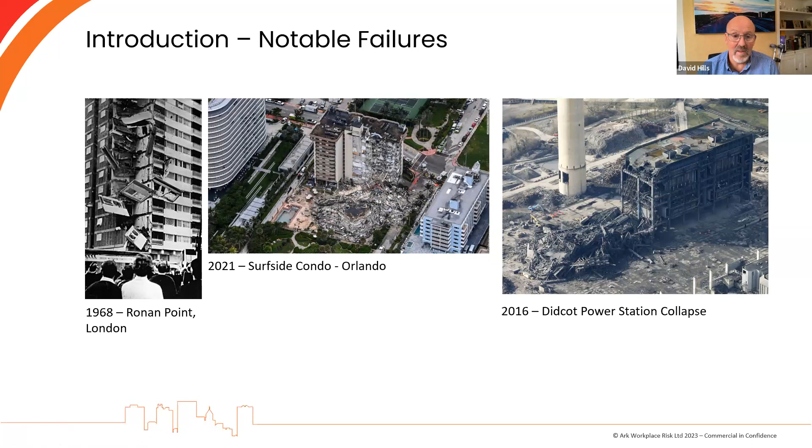So what is structural risk management? Structural risk management does depend upon where you are in that building's life cycle. For example, structural risk management in the design process is completely different to during the service life of that building, the in-use area. During the design process, you will have structural engineers undertake a technical design and development for that particular building. During the construction process, structural engineers will continue to be involved and deal with change management.

Now, obviously, during the in-use phase of that building, you're going to need to undertake ongoing assessment and inspection of that building, depending upon the design and the arrangements. And then during any refurbishment, you would normally have a structural engineering technical design again with ongoing management, and then again through development and into demolition, you'll need further technical support and ongoing management.

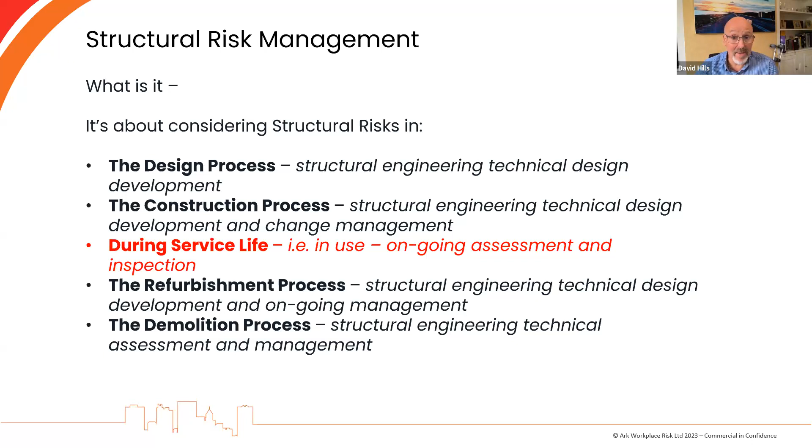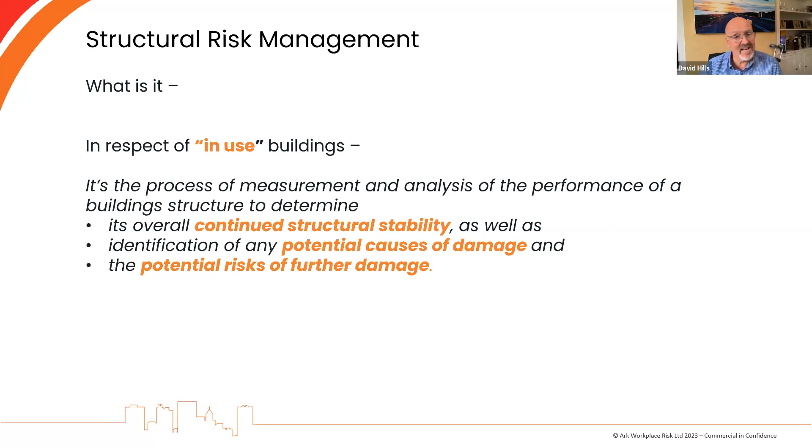So I'm going to focus, as I said, on the in-use buildings area. For in-use buildings, structural risk management is actually a very simple process. It's a process of measurement and analysis of the performance of that building's structure. And what we're looking to achieve through that process is 3 things. We want to determine the overall continued structural stability of that building, making sure that it's going to stay there and continue to perform as designed. We also want to identify any potential causes of any damage and understand any potential risks for further damage. So structural risk management is about measurement and analysis of the performance of that building.

Next slide, please. Now, the benefits of structural risk management are relatively simple and pretty easy to understand. It's going to provide you with very good early warning of any structural weakness within your particular building, be it residential, commercial, or retail, it doesn't really matter. We need to understand what those potential structural weaknesses are and determine if we have any damage within that building. Now, this is going to be crucial for different reasons.

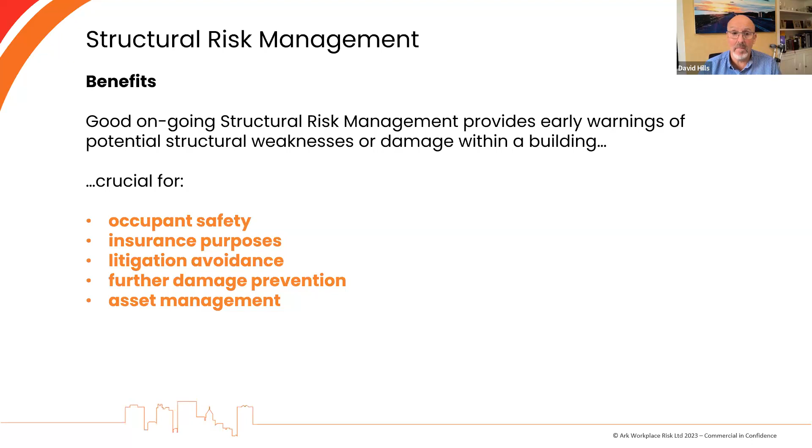Clearly, under the Building Safety Act, which focuses very much on residential blocks, it's going to be crucial to ensure the occupants' safety, the safety of the residents within that building. But it's also going to be crucial for insurance purposes, ensuring that you're getting the best out of your insurance premiums and the most favorable rates. For avoiding litigation, you certainly don't want to get involved with litigation, and understanding how that building is operated, designed, and how that structure is working is important, and also to further prevent damage to that building, and of course day-to-day asset management.

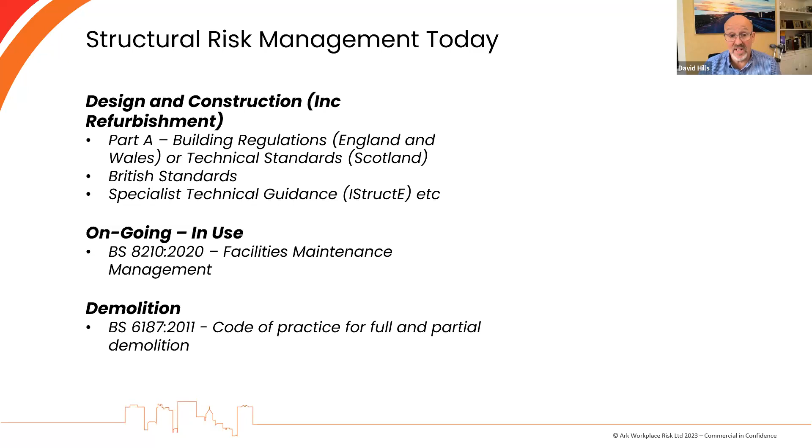And then going on from that, just focusing on one British standard, but there is plenty of other guidance out there in respect of demolition, we've got BS 6187, the Code of Practice for Full and Partial Demolition, which will support risk management processes through the demolition process. Next slide, please.

Okay, so I'm going to focus for the next couple of minutes on BS 8210, because structural risk management is fully enshrined within that Code of Practice, and it's a really good Code of Practice that supports the whole process. It makes a very clear statement early on which suggests that failure to maintain the structure and fabric can affect its function and presents safety risks, in addition to reducing the value of the facility as an asset.

So clearly, structural risk management is a key element here in order to maintain the building, and as part of a facilities management team's processes as well. Next slide, please.

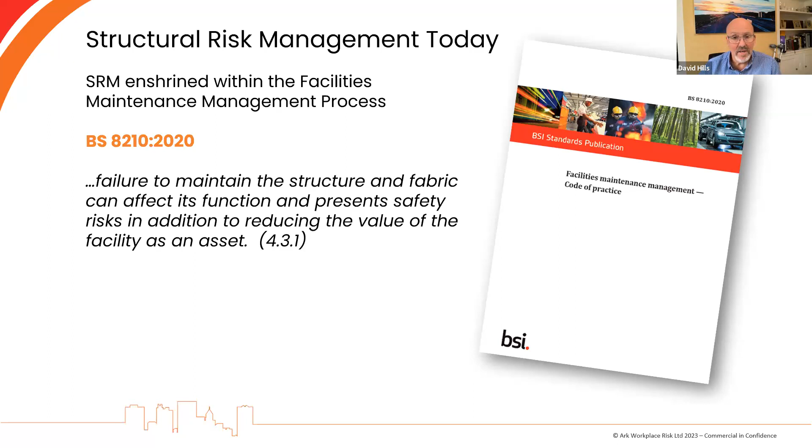So what does the standard suggest that you should be doing? First things first, you need to understand the building. So you need to maintain records relating to the structure of that building. The first thing we ought to try and get hold of, and I understand that getting hold of some of this information is incredibly difficult, is plans and design arrangements. Understanding the design parameters of a building is vital.

It used to be that many buildings, especially in London, had signs within them to indicate the design loadings. That requirement has gone, but understanding those design loadings is a really important element, especially if you're going through refurbishment or change of use, say a commercial office block that's being converted to a residential block. There will be differences in respect of the loadings, and they need to be fully understood.

In addition to that, you need to really understand the structural detailing. Now, I'm not suggesting that you need to understand the full structure of the building and how it operates. You need, though, to understand the key connections, where those connections between, say, columns and beams are, and how they need to be treated, how reinforcement needs to be protected.

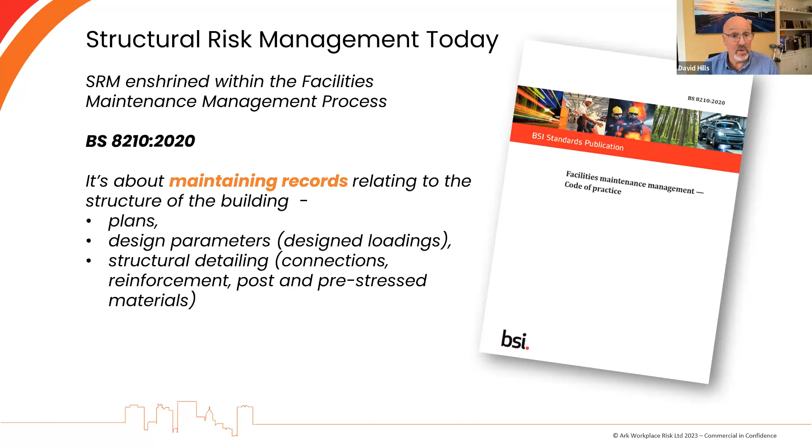And of course, if you've got post or pre-stressed materials within that structural frame, then you need to know exactly where they are so you know how to treat them during the maintenance processes. Next slide, please.

One of the things that is very interesting within the standard is that they make it very clear that you need to be assessing and inspecting the structure of the building on a regular basis. In fact, it states that a full assessment and inspection at intervals of not more than 3 years for the structure and fabric, etc., should be undertaken by competent persons.

I have to say, in my experience, we often suggest this to clients, but we're just not seeing organizations undertaking this type of really important inspection and assessment. It's really important, especially for buildings that are going to be covered by the Building Safety Act.

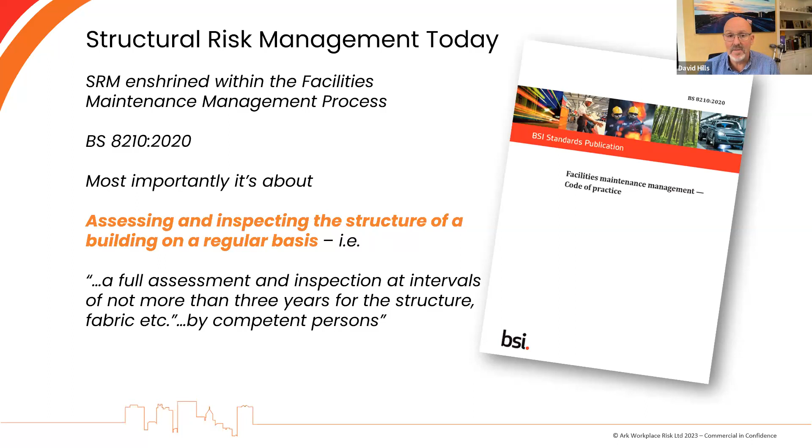Next slide, please. So talking of the Building Safety Act, I just wanted to touch on what building safety actually is and how it's defined within the Act.

But Section 84 of the Act makes it very clear that in respect of high-risk buildings, residential blocks over 18 meters or 7 stories that are occupied, the accountable person, or the person who generally owns the building or has the lease for and controlling interest of the common parts, must take all reasonable steps to firstly prevent building safety risks from materializing. And a building safety risk has been defined within the Act as being the risk of fire spread and structural safety.

So structures, as Sophie was saying there, is often seen as the poor cousin to fire safety. But in addition to preventing those risks materializing, it's really important that we understand that despite all of the activities that are undertaken to prevent, there may be times when those structural risks materialize themselves. So the idea is to actually reduce the severity of any incident that does materialize. So next slide, please.

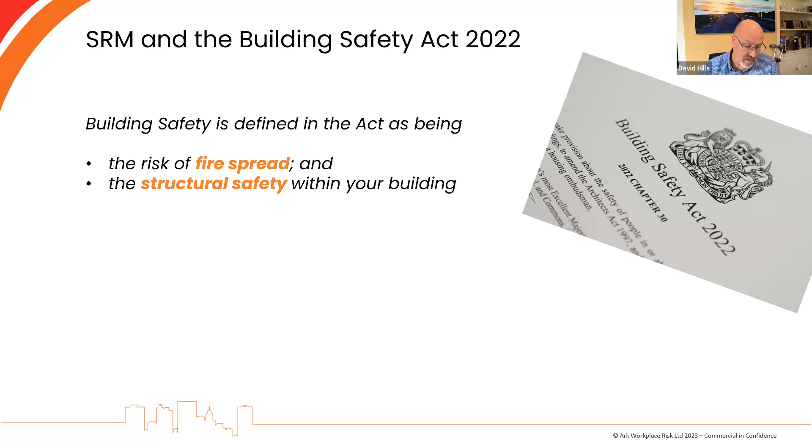In order to meet the requirements of the BSA in respect of structural risk management, we are still waiting for guidance and secondary legislation from the government. So how we've been advising clients is really looking at the likes of BS 8644 Part 1, on the understanding that that's going to be reviewed, as well as the RIBA Plan of Work guidance, as well as the Institution of Structural Engineers Plan of Work guidance.

So we would suggest that in respect of the structure of this building or any building, you should ensure that your risk assessments at least cover structural issues, that you look for those condition surveys that are contained or recommended within BS 8210, that any other surveys, records, drawings, or specifications that you've been able to obtain should be held. And then, of course, all maintenance records in relation to the structure need to be available.

If possible, but it may not be necessary, it does really depend upon the age and type of your building, it would be good to have details of the building control approvals for that building. And if possible, although I totally understand it's very unlikely that you'll be able to capture this, some original design data in respect of the approach, what type of design and the calculations that are available. And we would suggest these need to be stored not only as part of your golden thread, but be there to support your safety case as well.

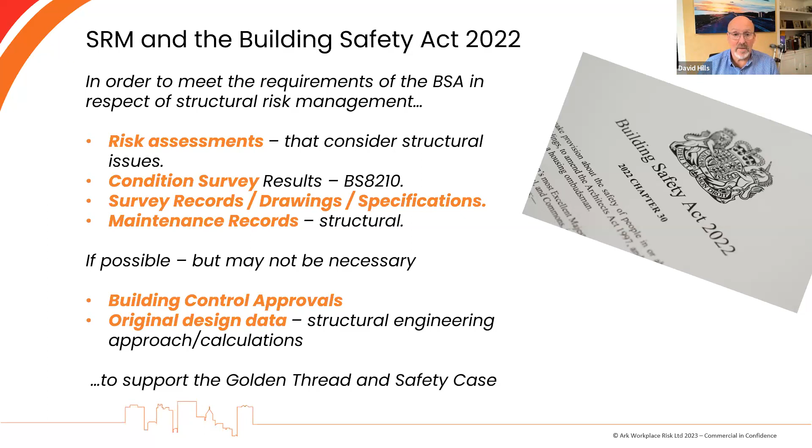So what does the safety case report probably require of you? As I say, we're still waiting for guidance, although the guidance from the regulator at the moment is suggesting that we really do need to understand how the building was designed and constructed structurally. So we need to understand the foundations. We need to understand the structural frame. We need to understand if disproportionate or progressive collapse considerations have been taken into account. We also need to understand the exterior wall and the roof.

We ought to be thinking about what could go wrong. So what failure scenarios need to be considered and what control measures do we have? We also need to understand the current condition and what our future plans are for that particular building. The guidance from the regulator says that we should be looking at management for now and in the future. So it's really important that we understand those future plans as well. Next slide, please.

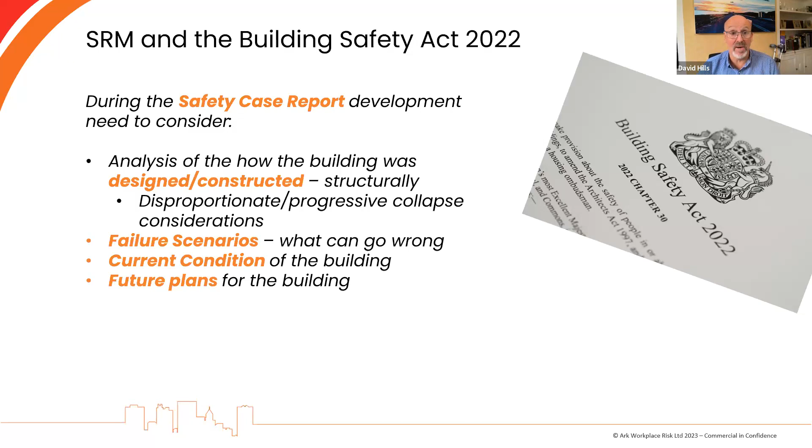So I've not given all of the failure scenarios that we are aware of. Just thought I'd give you some overview of the type of failure scenarios that perhaps need to be considered, such as the structural failure of a primary load-bearing element. That could be down to, say, overloading, installation error, construction error, or incorrect design. That could lead to disproportionate collapse or falling debris, and obviously that may lead to potential severe injuries or even deaths as well.

We could also have, for example, external impact. I've dealt with personally a significant number of buildings where, for example, cars or lorries have driven into buildings because of the lack of protection. So collision with buildings needs to be considered.

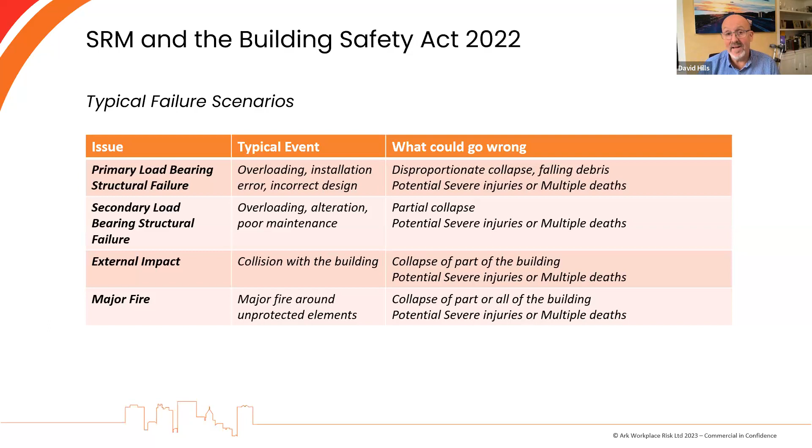And again, what control measures do we have in place to prevent that if it's actually necessary or seen as a major risk? And then, of course, issues such as major fire could in fact actually damage the unprotected elements of structure to such an extent where we actually have collapse of part or all of the building as well. So you need to understand all of the potential failure scenarios when you're actually looking at your safety case report, because the regulator is going to be looking for how are you preventing that or limiting the consequences of any action. Next slide, please.

Now, I mentioned section 84 of the Act earlier. What the Act also goes on to mention within section 84 is the fact that there is a very, very clear need that when you're considering the steps taken in respect of building safety, the accountable person actually makes and gives effect, for the purposes of ensuring the effective planning, organisation, control, monitoring and review of those steps taken, to a management system, a building safety management system.

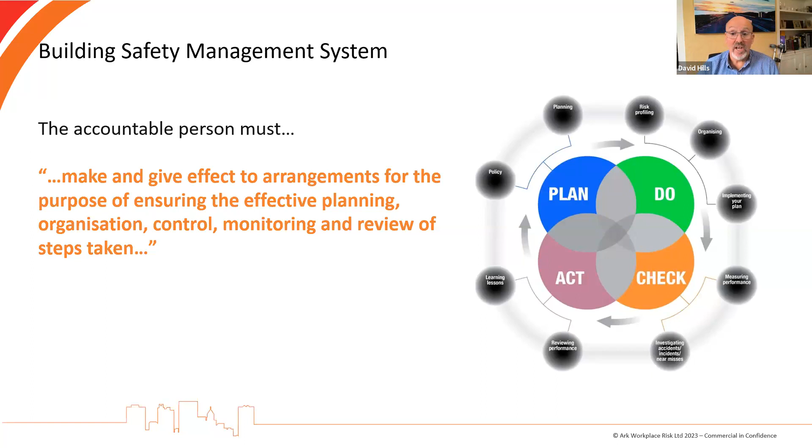Now, a lot of organisations have corporate management systems. Those management systems are very clearly a framework, but we need to therefore focus very much on the specific building itself. And the HSE have come up with a very simple plan, do, check, act approach that could be used in order to support that whole process. Next slide, please.

What we would suggest needs to be included within your local building safety management system is certainly a statement of intent, a policy statement. That's not an occupational health and safety policy statement out of the Health and Safety at Work Act or even out of ISO 45001, but something that's very specific about building safety. Details of the organisation, who is doing what, clear roles and responsibilities, very clear statements in respect of what management activities, what assessments are actually undertaken, and the maintenance and remediation action on both a proactive and reactive basis that are going to be in place or required for that building.

The government have looked at a digital management system. So how are we managing using digital systems? And I can show you one very quick one in my next slide, as well as look at how we are now reporting what we call mandatory occurrences. And Sophie mentioned the fact that we are still waiting for legislation. One of those pieces of legislation is actually going to fully define what a mandatory occurrence is, but we can see straight away that mandatory occurrences will include structural failures of whatever size.

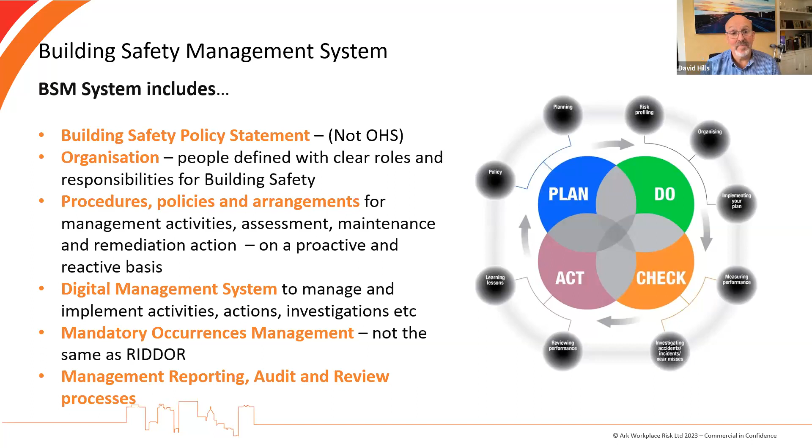Now, these are not the same as RIDDOR. RIDDOR obviously is about human beings. This is about the building itself. And then the final element of your building safety management system should be all about how you actually learn from the issues that you found, management reporting, how you audit and how you review. Next slide, please. My final slide is just all about digital platforms.

It's about making sure that whatever digital platform you use in order to support the building safety process, you actually have access to all of the available information. So you need to make sure that whatever your system, and our system's called CUDA, it's been designed to support building safety. This is the building safety case section. And in this instance, for example, we're able to store condition surveys and other information relating to the structural safety of that particular building, and maintain a document history and an audit trail of what's been done to that building as and when it gets changed. That's the end of my presentation. So Sophie, back over to you.

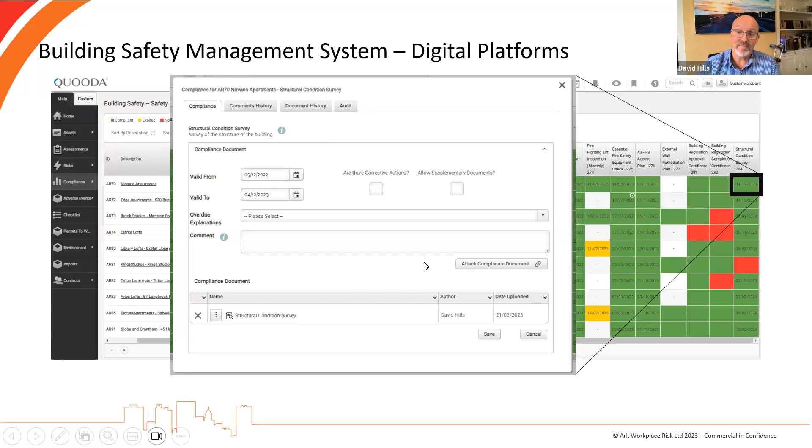David, just to start off with you, you mentioned only 4 out of 25 different causes of structural failure. Can you give us a little bit more of an idea what the wider causes of structural failure actually are, please? Yeah, some very interesting ones that we've seen.

For example, during refurbishment, a lot of people don't understand the actual structure of the building. It's been inadequately assessed. And I mentioned earlier, for example, the use of pre-stressed or pre-tensioned materials within a structural frame. And those particular materials are not particularly well suited to being adjusted. Drilling into them is not a particularly good or advisable event.

So refurbishment issues are very much in the fold, especially, as I said, as we're seeing significant changes of use from office buildings to other building types, mainly because of the pandemic, but also because of other requirements to increase the housing stock that we've got within the UK, and obviously encourage people back into the city and the town.